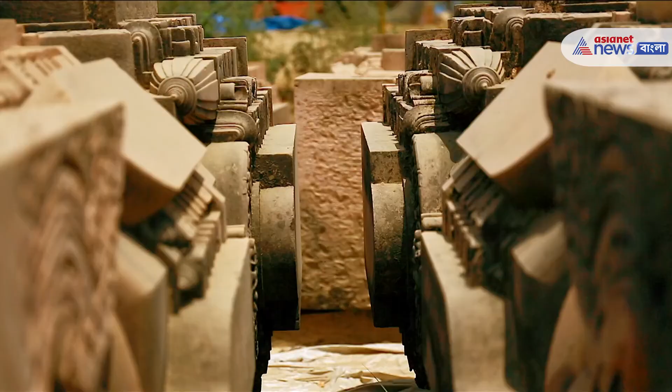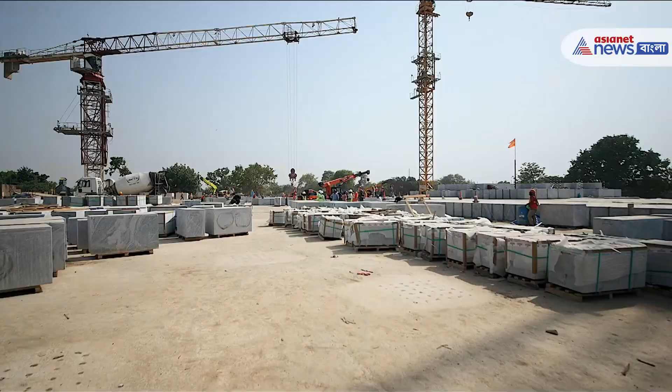The world wants to know what is happening in Ayodhya. How much of the construction work is over? How much of it remains? What all is in store for pilgrims who will come to Ayodhya from all over the world?

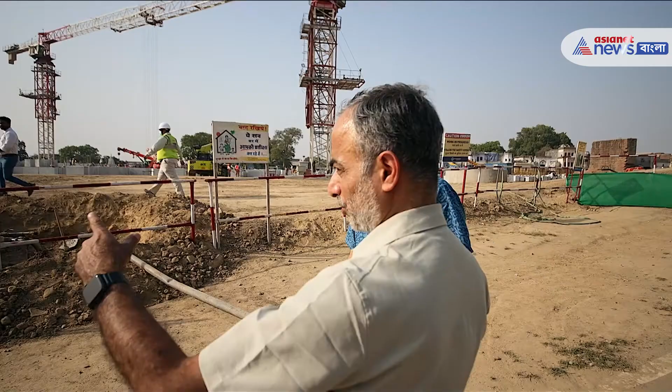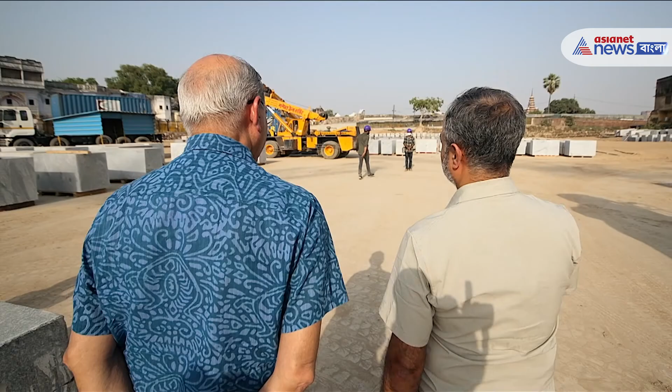And to tell you all, we will have with us Mr. Nripendra Mishra, virtually from the horse's mouth, who will tell us exactly what has happened and what is going to happen in future. And to hear it from a person who actually matters the most as far as the construction of this temple is concerned, we are privileged to have with us Mr. Nripendra Mishra ji. He is the chairman of the Temple Construction Committee and he was also the principal secretary to the Prime Minister Shri Narendra Modi ji before he took on this role.

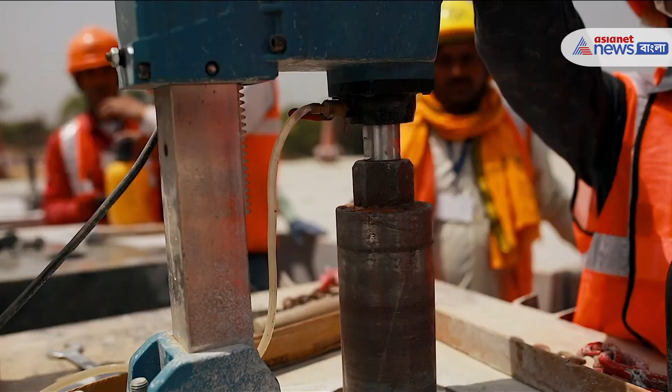It is indeed an honor and privilege for us to be here and be shown around the place by Shri Mishra ji. Thank you so much for being with us. Thank you. Where have we reached in the construction so far?

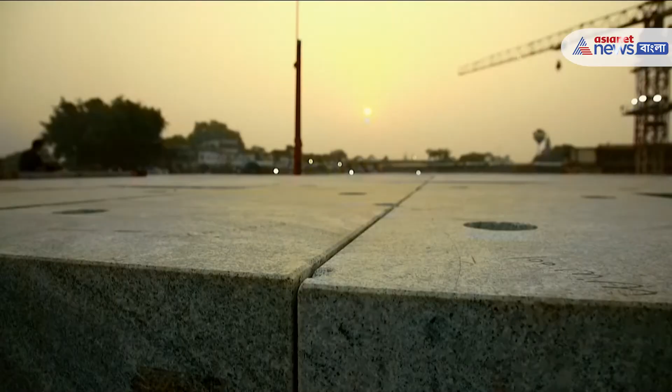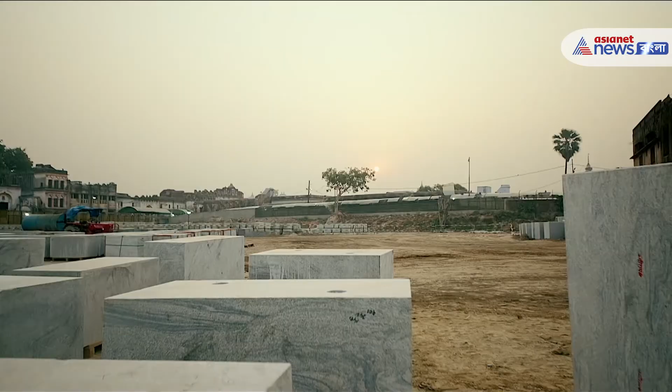The biggest challenge of this place, which we faced, was the foundation. As a result of soil testing, it was evidently clear that we may go for pile foundation, which we did. But after initial testing, the data which came to us of the pile testing, it was very clear that perhaps we have to excavate the entire soil. So you can well imagine this 2 acre of land which we have got, we had to dig out. How much? 15 meters deep. 15 meters, not feet. It's almost like a 3-story building.

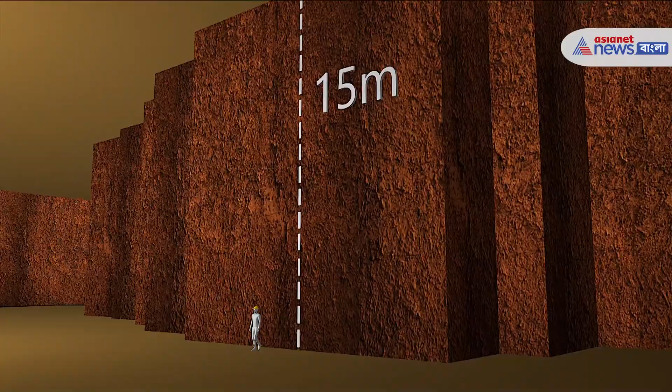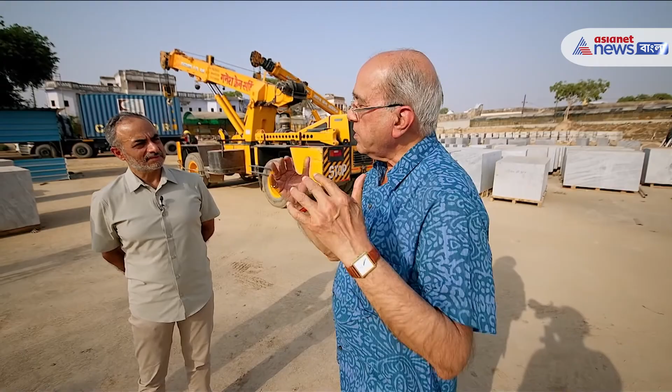And the entire soil was taken out. The biggest challenge was then that it had to be done before monsoon. Fortunately, we could do that. If you had visited then, you would have seen that there is a big size well which has been created. We had to fill that with fresh soil, what is called engineered soil. Engineered soil is which makes, after settlement, converts itself into a rock. So for the foundation, in order to have a rock foundation, we did the engineered soil, filled it, and that filling required compaction. That filling required testing of each layer for how much strength it has. Anyway, we succeeded.

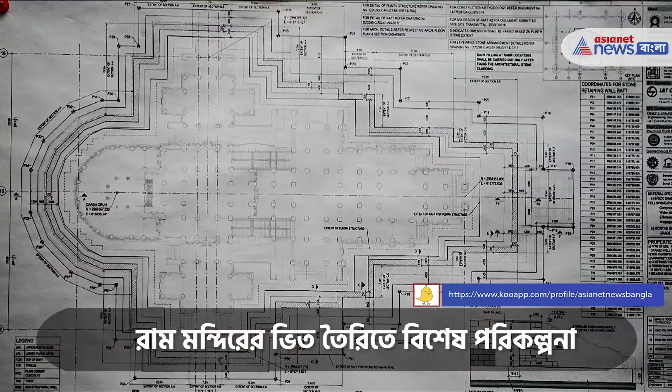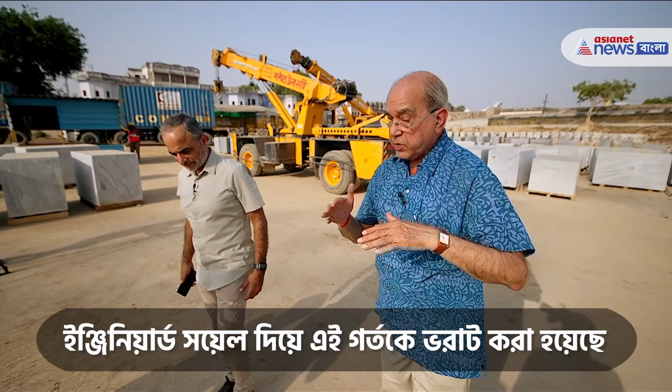As you know, the constructing agency is a well-known agency called Larsen and Toubro, and our project monitoring is being done by Tata Consulting Engineers. After having done about 15 meters of foundation, the kind of advice that was received to us, we have a committee. The committee has got representatives from 5 IITs - IIT Madras, IIT Delhi, NIT Surat, IIT Kanpur, and an IIT-like institution in Hyderabad. So all of them joined along with the experts of L&T and TCE, and they decide and make the recommendation on any issue which comes up.

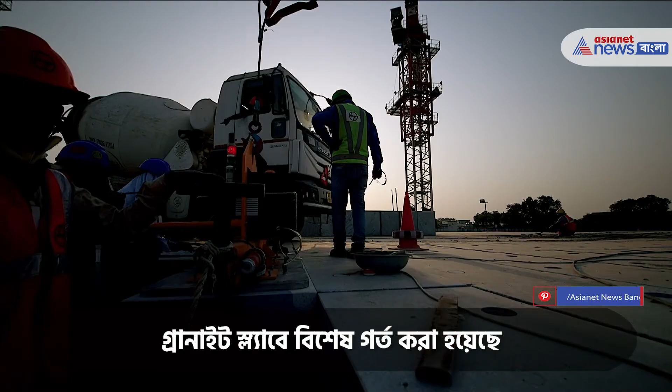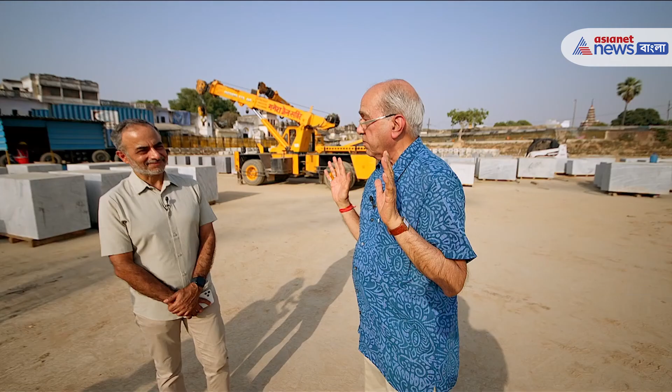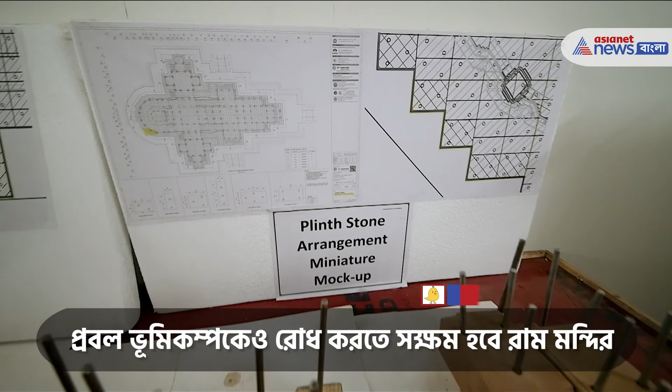So after the pile, the issue was what should be the material used for raft foundation, because after the foundation the raft came up. This is the raft - you are standing on it. There is always an opinion that the temple must not be less than, construction should be such that it should not be less than 1,000 years life. So the whole challenge was you must have specifications which will last 1,000 years. After that, the plinth structure came, which is at this point, so that will answer your question of where you are in terms of the temple construction. This now is 5.5 meters.

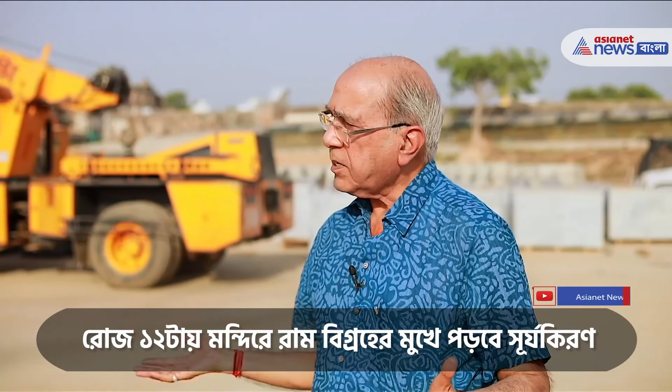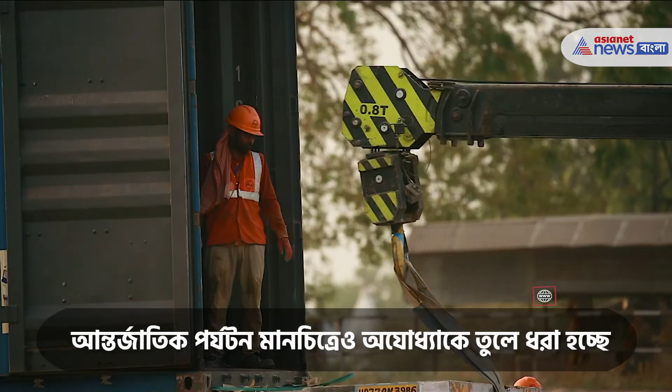Yeah, you can see this here, all of this - that you see is the granite that we have got.

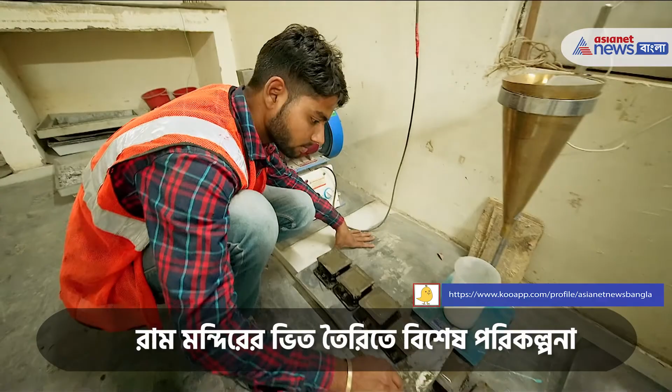So when you say it can withstand an earthquake, do they say to what Richter scale can it take? They have studied all the records from Nepal to about 500 kilometers from here, and whatever has been the maximum and the minimum, it can take care of not only that, let us say it is double of the Richter scale on which anything has happened historically. Yeah, it can withstand. It can withstand.

So it's indestructible in a way. We would like to think that. Let me tell you that.

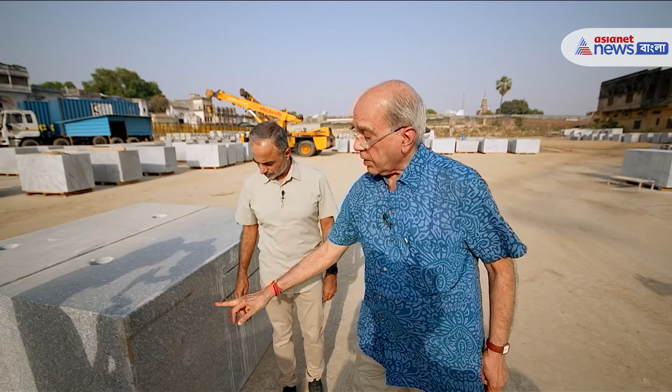This kind of a thing, you have to put 7 layers. 7 layers, yes. So up to the third layer we have reached.

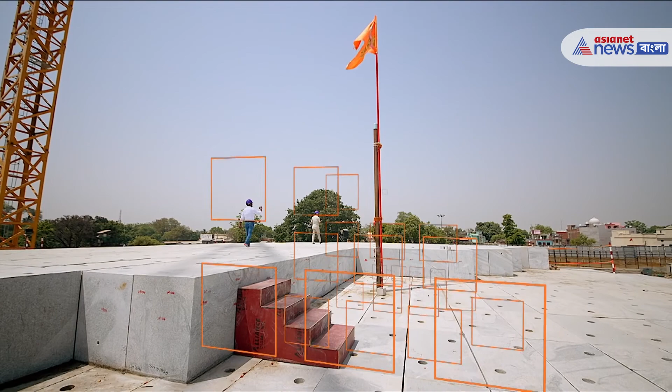So our best attempt is that by December 2023 we may be able to complete the ground floor of the Garbhagriha.

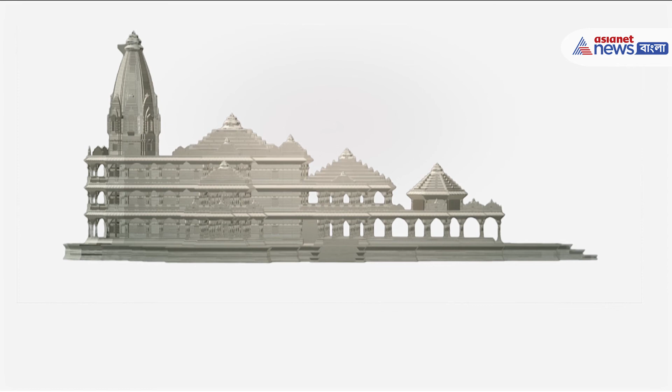You just have 1.5 years before that. Yes. So now you can imagine what kind of work is left. I can perhaps predict, it is not good to commit, but I would predict that by end of 2024, all the floors may be complete. The inner carvings would still be done because, you know, iconography will continue.

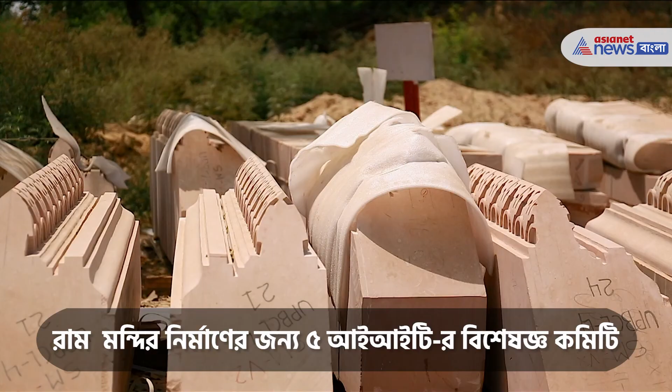But we have another challenge, 67 acres of land around, outside, which is called the complex, the temple complex. There we have the temple of Valmiki ji. We are planning to have a temple of Nishad. And similarly, a temple of Sabri, Sabri Mata, who fed him fruits.

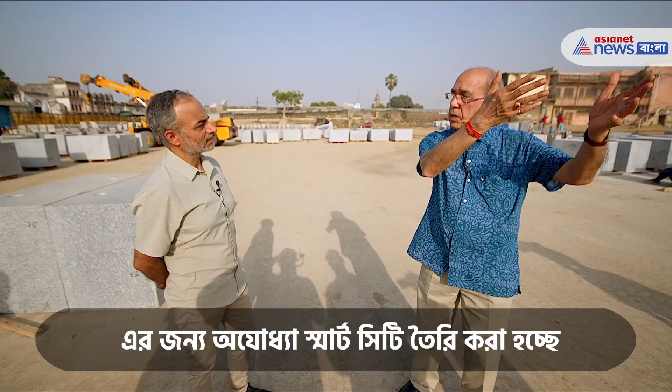The idea is we must have the temples which will make all communities, people of all faiths, believe that this is our Bhagwan and he has not been hijacked by any particular community.

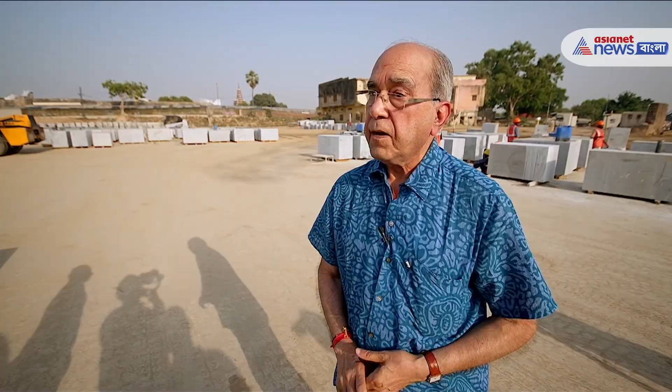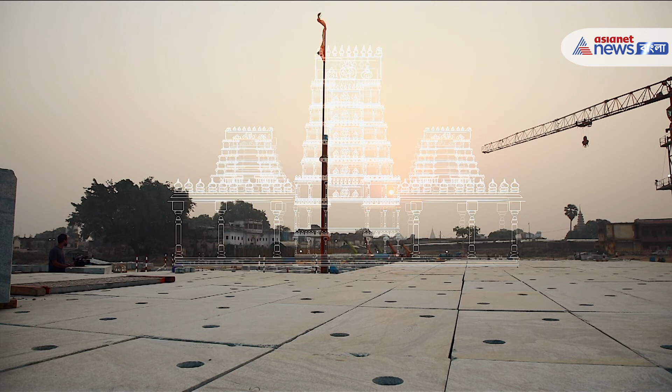The entrance on the east, the Dwar, will be Gopuram style, which represents the temples of the south. So we want to capture that in order to have these interesting features.

When you talk about a 1,000-year life of a temple, what kind of engineering is there that it will last 1,000 years? There is no steel. How does it work? How do you put things together?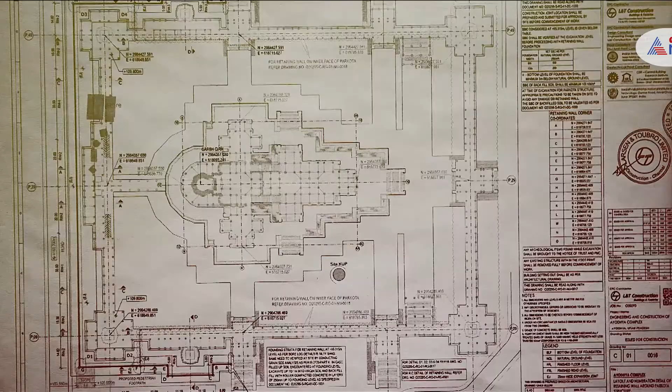Each material being used, each design and drawing being done, is initiated by IIT Chennai, Madras. Then that is tested by L&T and TCE. Finally, we have given the stability test for this agenda of 1,000 years to the Central Building Research Institute, who have tested the entire thing for every load which will come on the building.

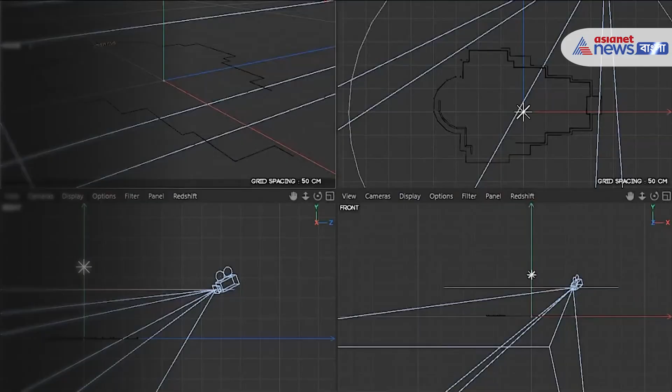Every load has been computerized, simulation exercise has been done. How much load will come on the plinth? The bearing capacity of the plinth is being tested. How much then will get passed on to the raft? That is being tested. And how much finally goes to the foundation.

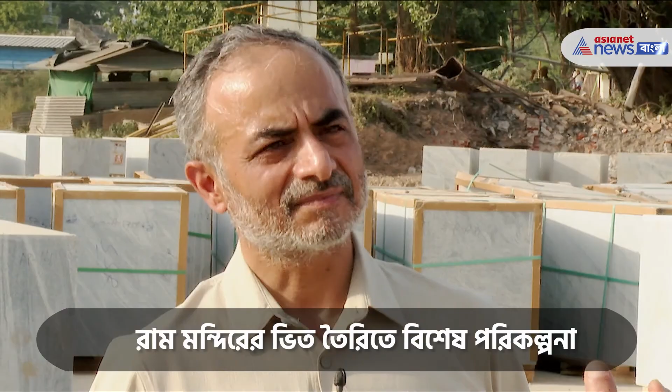So at each level, the load factor, the stability, the seismic influences of earthquakes, etc., everything is factored in. Everything is tested by the Central Building Research Institute, who have now submitted a full report of their work from foundation to plinth, and given all the calculations and what assumptions they have made. They have even explained why 2,500 years of seismic changes.

Why not more, why not less? Why be impractical? That reasoning has been given by Central Building Research Institute, that it's the international standard for such buildings. So to your question, the short answer is that we are dependent on the best brains of this country in the field of engineering, in the field of civil engineering. They have all joined together to work on this, to pursue only one objective: how to make this temple durable for 1,000 years, and unique. That is what we are doing.

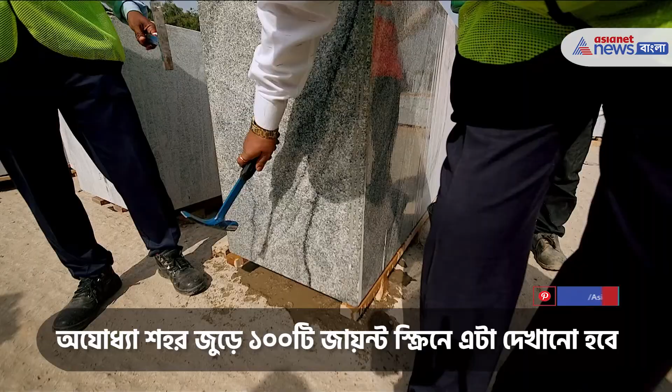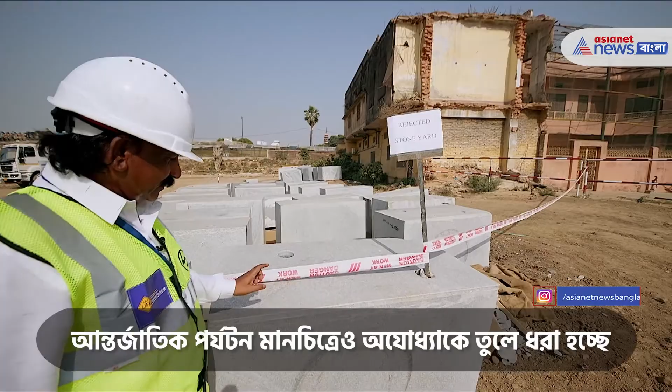What were the challenges other than the long rain spell, and anything else anecdotal that you'll think, 'we got past that too'? I will tell you about the challenges because it is very fresh in my mind.

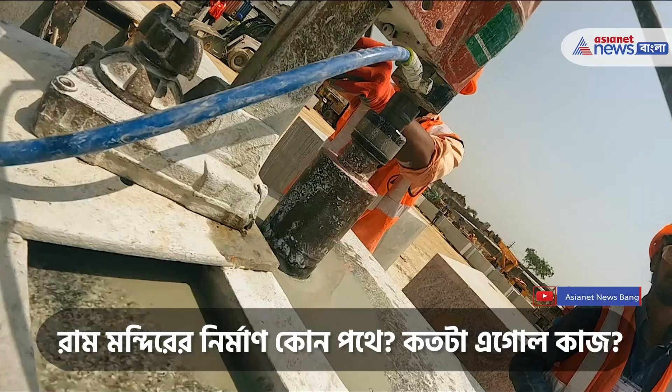I just showed you the holes in the granite plinth foundation. A view emerged that whatever copper connections you provide, there will still be some space in the hole which is not symmetrical. So should this hole be left open? One viewpoint was yes, we should leave it, it will do no damage, since external material will not be accepted by this. But it might cause harm to the plinth—whatever you put in might come out over 1, 5, or 10 years. But there could be challenges: growth, water getting in, fungus growth, things like that.

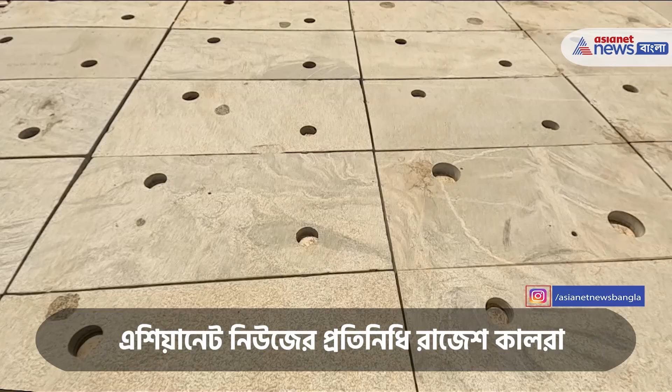So finally we referred the matter to the topmost group of IIT experts. They all joined hands and recommended that we should not leave it open, and that we are going to fill it with a special mortar which will ensure it remains stuck with no space in between, while having enough resilience for any shaking that may come.

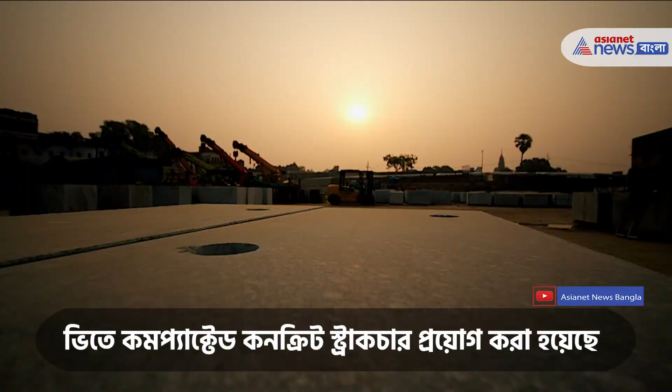So this issue applied to both the horizontal and vertical holes. It finally got decided what material will be used, how much will be used, and in what manner—the SOP, the system of filling, the engineering procedure to be followed, because you have to create pressure so that it goes inside as slurry. So that was decided.

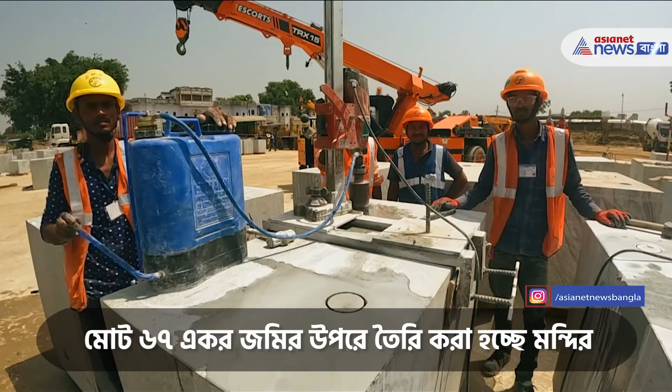I have to tell you, it comes every week. And every week, fortunately, we have the technology, we meet virtually, one-to-one, and pose the problem to our engineers. They are extremely receptive and understand the urgency. They have been able to provide solutions to all the questions.

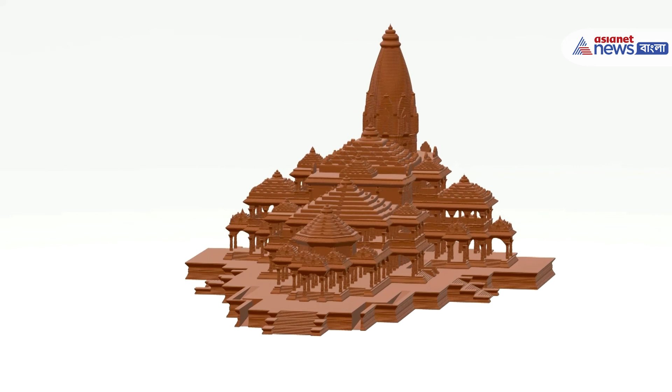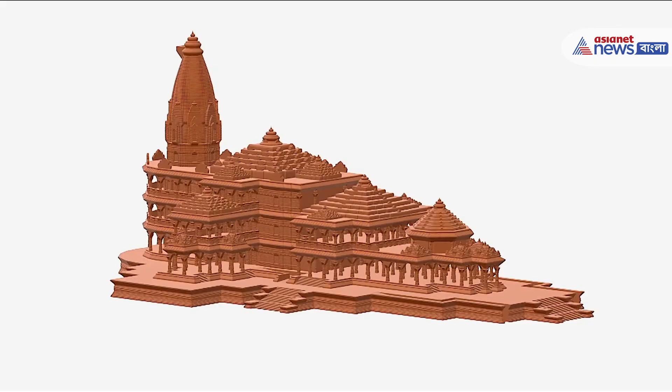These questions are raised not only by members of the trust, but also by a very important seer. He wrote a letter saying he had come to know that the Garbhagriha would be covered by some kind of roof, and his objection was that in such a construction, if devotees come on the first floor, their feet will be above the deity. How can you do that? So we had to go to him and explain, showing the design and drawings. He was convinced once he understood that only the Ram Darbar would be on the top floor, and no one could visit that part.

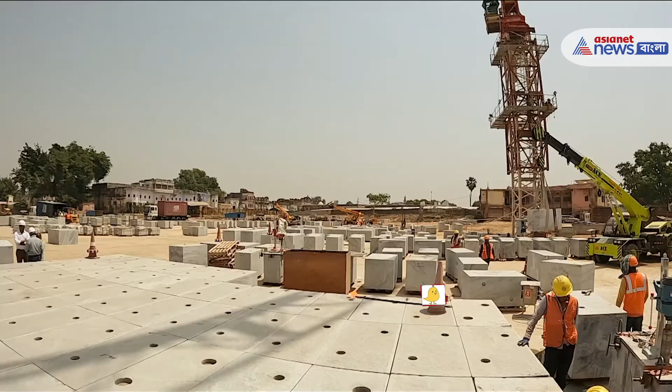These are sentimental issues that also come up, and we respect that. I have no doubt that things are going as per plan so far. I would say this is the best engineering delivery I could witness.

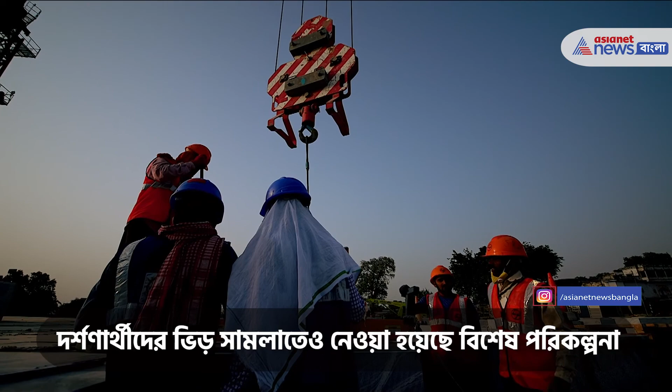Coming to the design of the temple, what is the style that was picked?

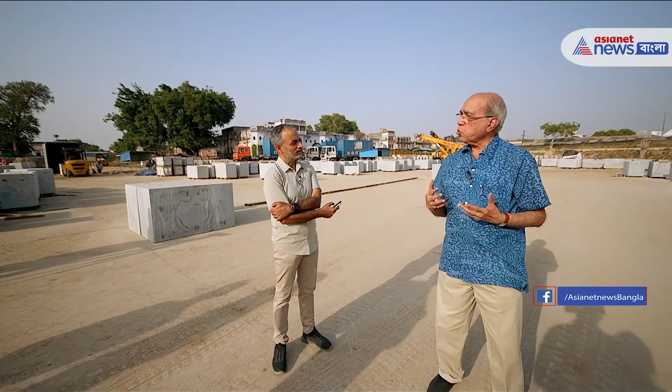This temple's architect is a Mr. Sompura. His family has built temples only, and this project was signed in 1992 — the architect was given this job that year. Out of all the temple styles, he decided this temple should be made in what is called the Nagar style, Nagar culture.

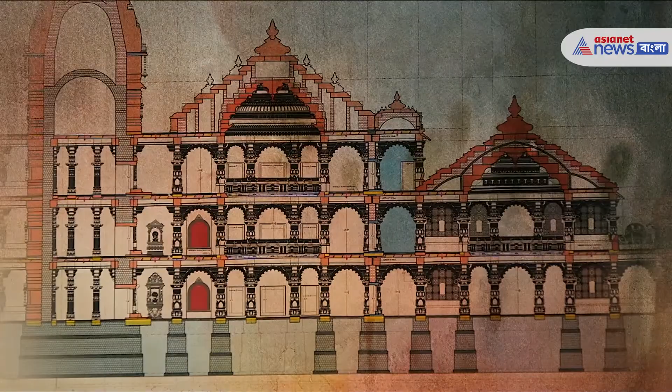I suppose the technical features combined with religious sentiments were in many ways audited by the engineers, who recommended that this architectural design is perhaps one of the most suitable and will be compatible with the target of 1,000 years. The saints and religious leaders also approved that this seems to be in keeping with the tradition of Raghuvansh.

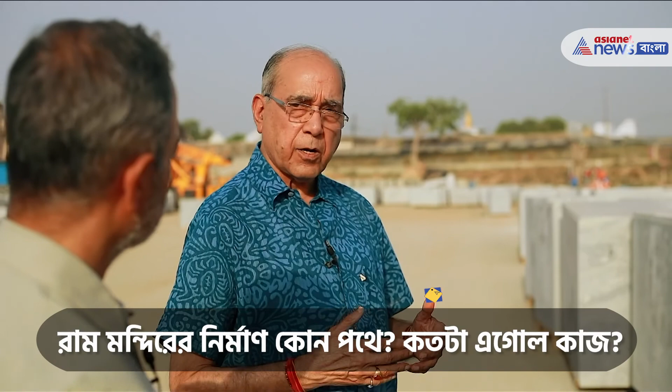आज यहाँ पर आप आए हैं तो संभवतः 2 या 3 से ज़्यादा बड़े होटल नहीं हैं। आपको भी हो सकता है कठिनाई हुई है, टैक्सी की सुविधा कम है। यह सब आने वाले 2 वर्ष में हमको डेवलप अवश्य करना है। हो जाएगा इतनी जल्दी डेवलप?

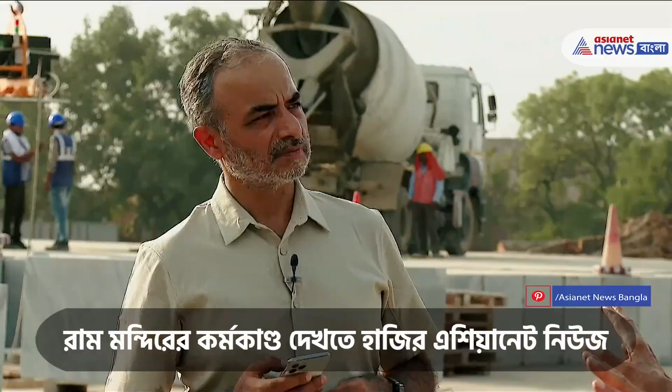At the official level, the Chief Secretary and Additional Chief Secretary, they come here. The Additional Chief Secretary is a member of the trust. They come here and monitor both the development here and the development outside, particularly the roads, the bus station, the car parking, the facility for tourists. All these things are being looked after.

Do they have the budget for all these external developments? Well, we have the promise of the Chief Minister that for the development of this city, budget will not be a constraint.

कदाचित आपको बताया गया होगा कि यहाँ पर एक स्मार्ट सिटी बनाया जा रहा है। स्मार्ट सिटी में संभवतः 1000 से 1200 एकड़ जमीन लिया जाएगा और उसमें इस प्रकार से जमीन का आवंटन होगा कि जो भी स्टेट्स चाहेंगी उनका वहाँ पर गेस्ट हाउस बनेगा। यदि कोई विदेशी सरकार, जैसे बहुत से लोग विश्वास रखते हैं, कि वो यहाँ पर एक गेस्ट हाउस बनाना चाहें, हो सकता है, मैं नाम लेना उचित नहीं समझता, लेकिन अगर लूँ, हमारा मित्र देश है नेपाल, उनके लोग हो सकता है, या मॉरिशस चाह सके, निर्माण कराना चाहें एक गेस्ट हाउस अपने लोगों के लिए, तो they can make it.

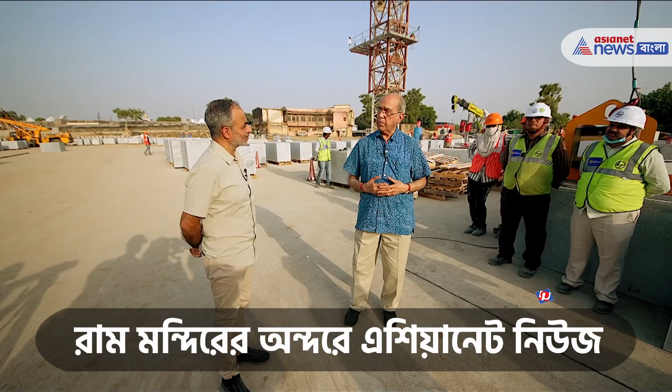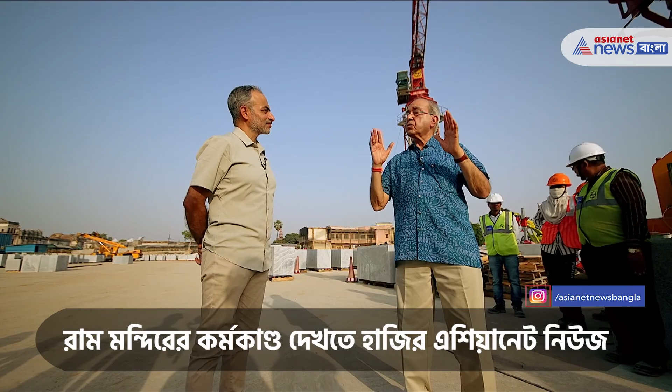To my great surprise, there was a judgment of the Honorable Supreme Court which resolved this issue, a dispute of 500 years or more. That decision of the Honorable Supreme Court says that there will be a chairman of the construction committee who will also be represented in the trust itself. So I would say it's a divine blessing. I definitely say that, because I have faith. So I think it's a responsibility I would like to fulfill to the best of my ability, and I keep thinking that if God has picked me up, He will definitely ensure that I cross the river.

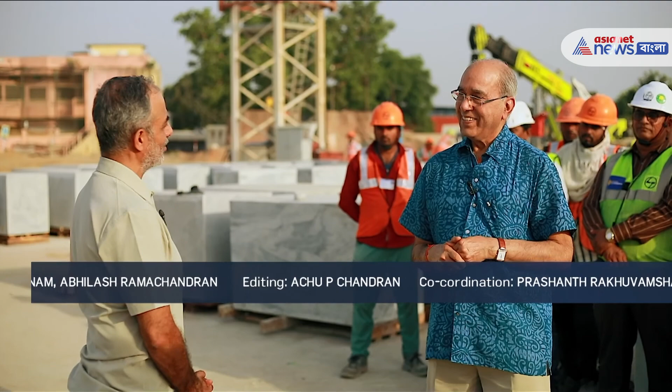No, he surely will. Yeah. And it is an absolute honor, as I said, and a privilege to have you show us around. We couldn't have found a better person to tell us, and our channel is extremely grateful. Really, thank you. You are extremely kind. Thank you so much.